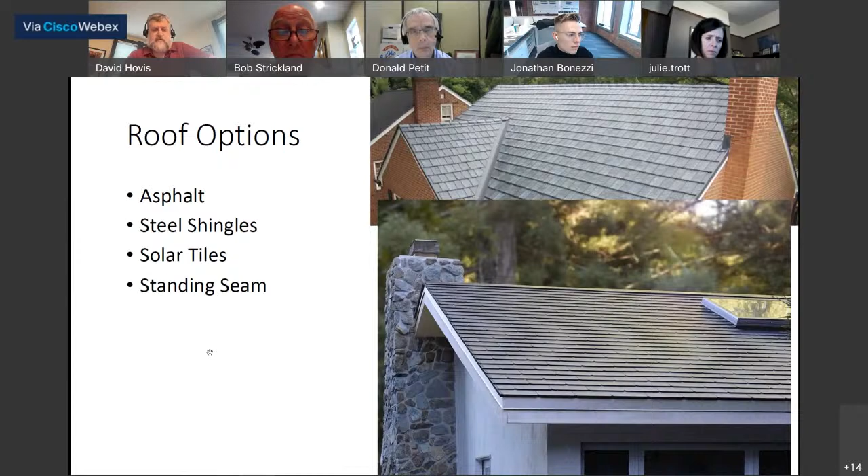Asphalt shingles have had quality problems over recent years. It's not hard to find stories about class action lawsuits involving particular brands and lines of shingles that turn out to be terrible, cheaply produced. We thought we bought good shingles 10 years ago, and clearly what we got were not good.

It is possible to mount solar atop asphalt shingles, but you have to be careful about how you do it so that you don't get water ingress.

Metal shingles are certainly more durable with great appearance, but the manufacturer says this is not compatible with solar. So because we want to add solar, that isn't an option.

The Tesla solar shingles sound like a great idea, but the jury's still kind of out. They're very expensive, although in theory, if you combine the cost of a new roof with the cost of solar, it's supposedly a bit of a wash. But Tesla is the only source of these, and until relatively recently they wouldn't even sell them in Ohio. Now they say they will, but they immediately tack on a $20,000 out-of-region fee because they don't have any installers in this area. Tesla is also very far backed up.

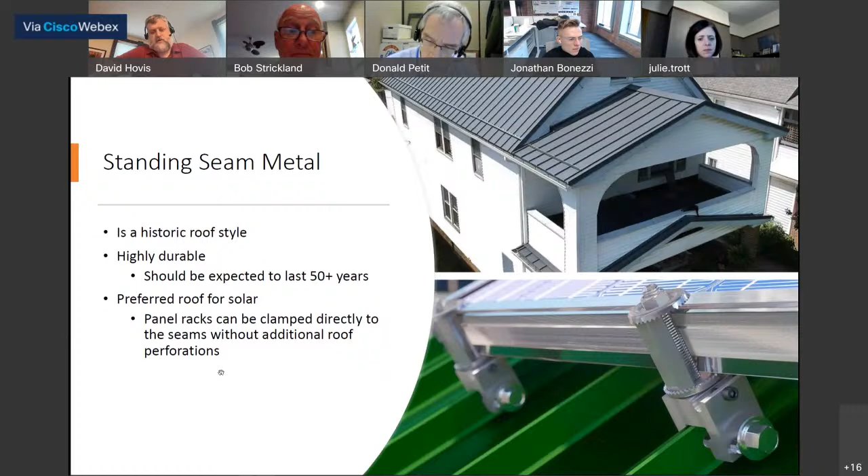There are numerous prominent houses in Ohio City with standing seam metal roofs, at least three of which you can see from various windows in our house since they're all within a half a block of us. I've provided numerous examples here. Probably the most prominent is the one shown twice, in the middle and bottom left, over on 1800 Fulton, which is very prominently visible as you drive up and down Fulton Avenue.

So what we are proposing is to put a standing seam metal roof on the house. We would like to fix it permanently and not have to worry about further maintenance issues. This is an upgrade, and it is more expensive than an asphalt roof.

We're using First Choice Roofing, who has done similar roofs in the neighborhood, and we want to use a standing seam product as shown here in the burnished slate color. We think the house probably had a slate roof once upon a time, although it's been a long time.

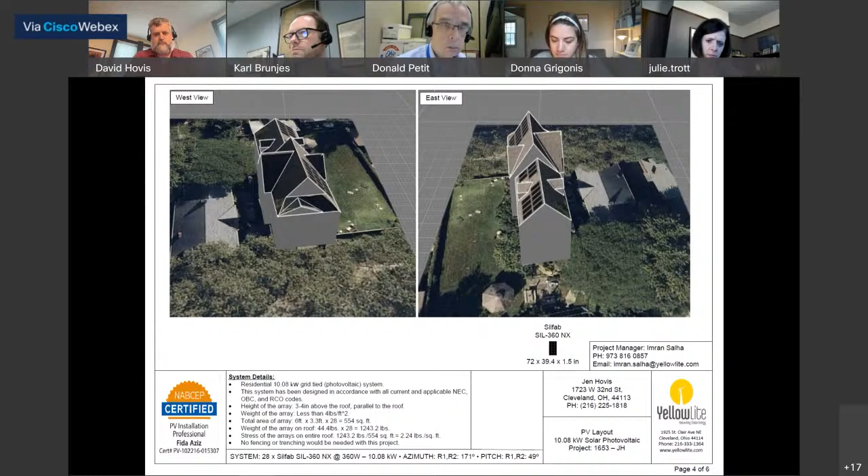This is a good example that all projects are taken individually and on their own merits, and have to be weighed in their own manner for what is appropriate to each project. Where we can look at precedent, yes, there are roofs, as were discussed, with metal roofs and solar panels—each of those was done on their own and in their own context. For new construction, metal roofs are appropriate.

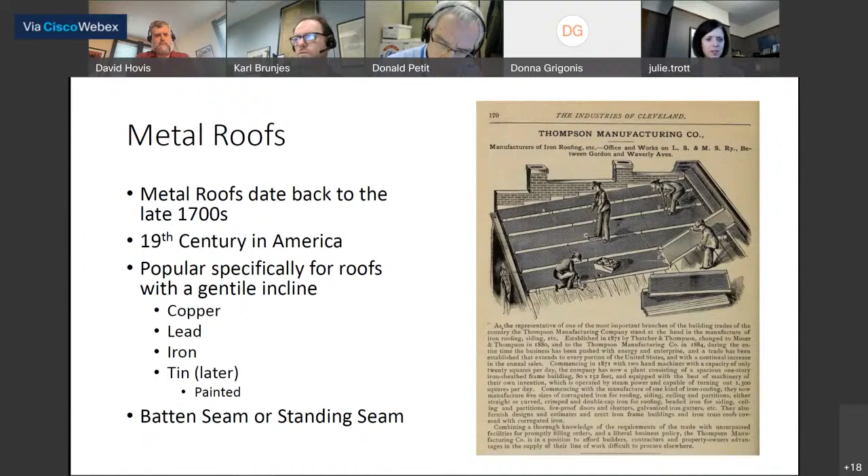Generally, they're for roofs with a gentle incline, as you can see here from this local advertisement from 1885. You can see how they're installing them. There were different materials used, and tin was the most popular one later, which you could paint different colors—that's why you would see red or patinaed green to match patinaed copper. The two main ones appropriate to the period are either batten seam or standing seam.

As I travel around, I usually take pictures in case I need examples, and there are several examples of historic roofs of this nature throughout the state that we don't necessarily have here. So it's always good to have other examples from around. I have a few pictures from Yellow Springs, Ohio.

Applying the Secretary of the Interior standards, it should be repaired rather than replaced. This would have been a slate roof due to the pitch and the time period, most likely. I tried to look at old building permits to confirm, because later on they would tell us what the building materials were, but there was no building permit for this, so it predates 1888.

The other permits on the street did not have any of that information, so I couldn't pull anything from that. But we need to make sure that we're keeping the historic character of the building and maintaining its visual qualities.

Appropriate replacements here would be slate, synthetic slate, metal shingles, architectural asphalt shingles, or dimensional asphalt shingles. An example of one of them was here—not here in Cleveland, but you get an idea of what it could look like.

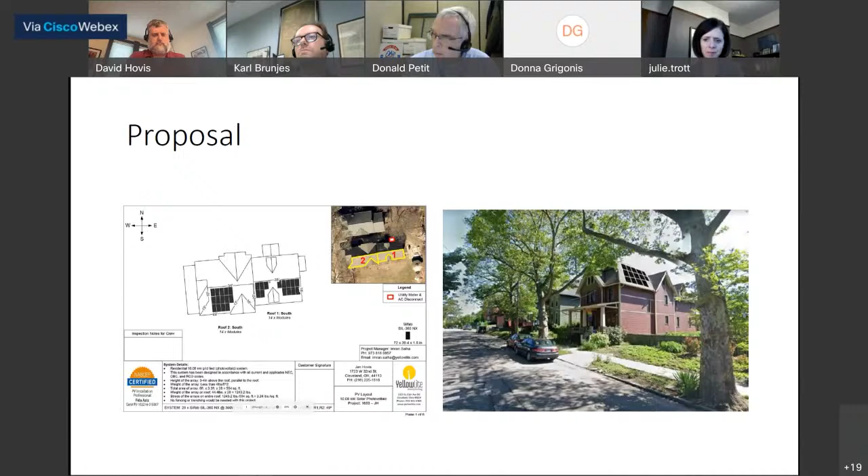Julie, you're muted. I'm the one who's muted. Thank you, Mr. Brunjes. We'll move on to Councilman McCormick.

Madam Chair, appreciate you having me—I always do that, so I'm glad someone else does as well. Thank you for having me this morning. Madam Chair, appreciate the commission hearing this case.

Let me first start by saying that the Hovis family has been not only an incredible part of our community as human beings, involved in all sorts of volunteer efforts, programming, our recreation league. If we think about an ideal community member and family, they are it. I know this commission is not in the business of the humans, but more of the structures, but I did want to start by saying we are extremely proud to have them in the neighborhood.

And that translates to their home as well, Madam Chair. As has been noted, they meticulously restored a historic structure in the neighborhood, similar to what I did—spent more money than they wanted to on the house. It is one of the most attractive and well-restored homes in the neighborhood. They have proven themselves to be incredible stewards of historic structures in our community and in this National Historic District.

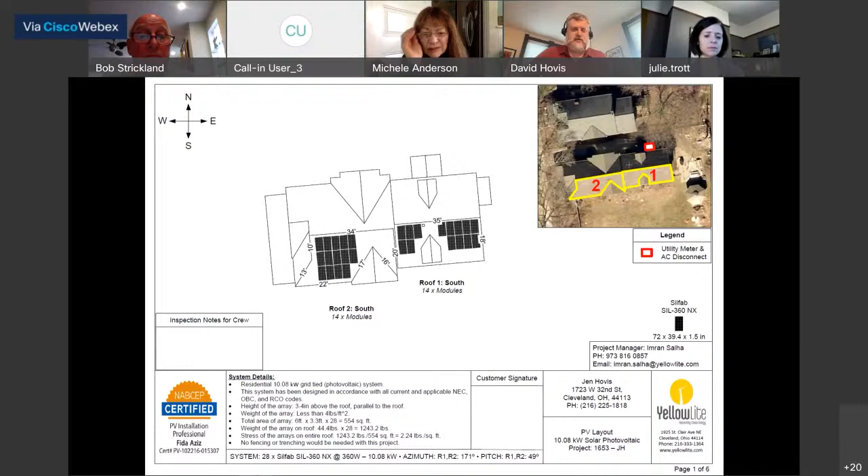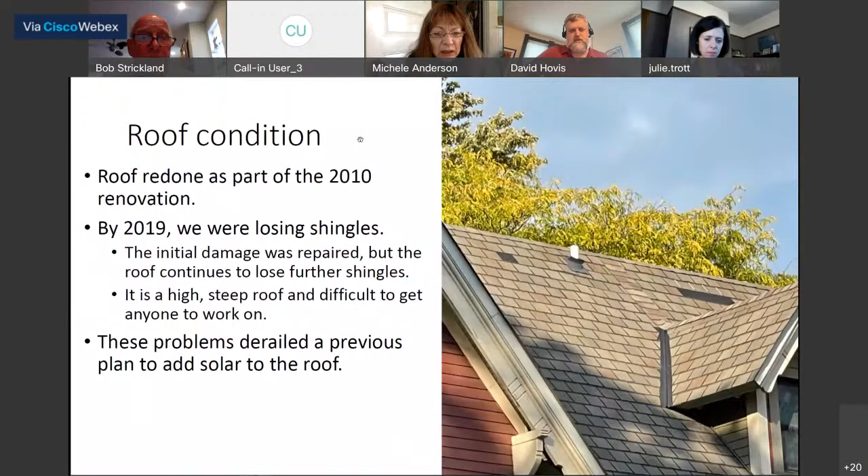So it's your preference to keep it the way it is. They haven't done the study to see if they can move it to the back, is what you're saying. Well, no, if you look at my presentation, what they had sent me before—admittedly, it's near the end of my presentation—you can see there were two panels south of that gable, but now, in between this and now, they determined they could fit 3 rows of panels. It does simplify installation a little bit, not to have a stranded set of panels back behind that gable.

Are your two roofs flush, or is there a step? No, there is a step. It looks like it's an addition, although I can tell you from having done the renovation, it is not. There's a couple foot step down from one roof to the other. I guess I'm trying to work to try to achieve your goal, but you meet our requirements—the more visible it is in the front, that is the issue.

I will say that, for example, the reason this roof is as visible as it is right now is because the house next door burned down in 2009. It was an arson, and that was actually the rooming house. The house that we bought was not a rooming house, it was just a 3-unit apartment building. It was well maintained, except for the fire damage from the house next door burning down, which necessitated huge amounts of work.

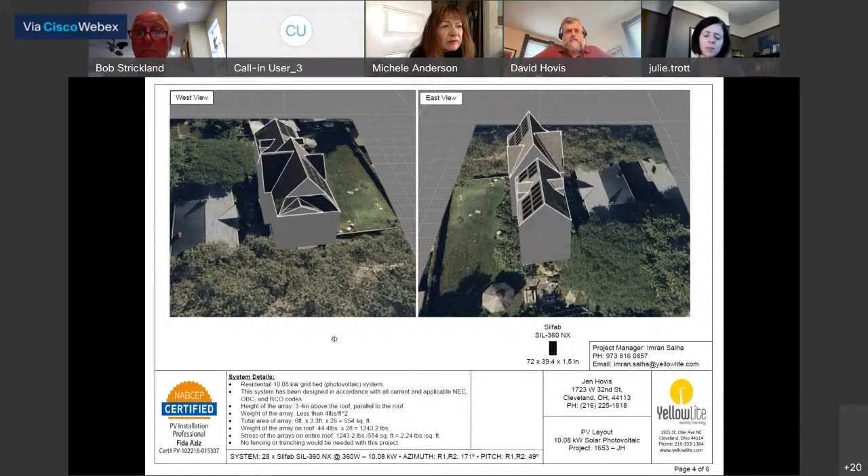We had a discussion with our roofer, and that was mostly around the idea that flat standing seam generates an oil canning effect due to thermal expansion and contraction. So having the striations in there gives the standing seam panel the ability to expand and contract without distorting, providing a more consistent visual appearance over the course of a day.

There's obviously varying widths of those standing seams, and the wider you go, you open yourself up for oil canning, but that's for a fairly wide standing seam.

I have mixed feelings about metal roofs. I think the more traditional profiles make it more appealing to me personally than the more modern corrugated profile, because that definitely takes it in a direction that isn't appropriate for the aesthetic of these houses. So that's my personal opinion. I think a traditional standing seam with smaller spacing of the seams feels more appropriate in circumstances like this than the modern metal panels.

But I do commend you for looking at solar and trying to find a compromise that can help you achieve your goals while still meeting the aesthetic of the area. So those are my comments. I'll move on to Mr. Bonezzi.

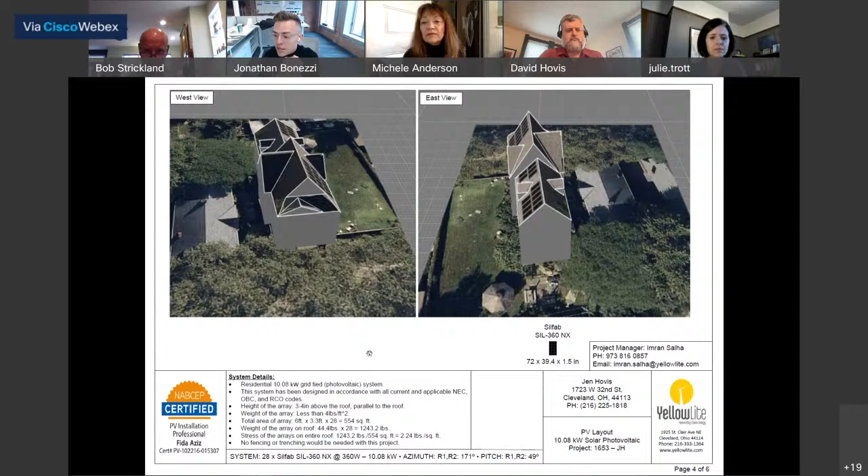That's not my expertise, but I think it's a conversation that should be had about maximizing as much as you can on that back elevation, and then seeing however many need to bleed onto the front, to meet your necessary values.

Thank you, Mr. Bonezzi. Mr. Brunjes?

Thank you, Madam Chair. I just want to add that the National Park Service guidelines were printed, or the bulletin was issued around 2011, so within the last 10 years. I was at the design review committee meeting, and Mr. Hovis, you mentioned potentially adding a garage in the future. I'm wondering if a garage is built, that might be an alternative place for some of the solar panels to help defer that.

I don't know, I think what I may have mentioned was that we own the lot to the south. It's a long story, but we bought the house, did the renovation, and made an offer on the lot to the south. In the meantime, we went $150,000 over budget, and then as we got to the end of the renovation, the people who owned the lot accepted our offer, and we had to scramble to buy it. Had they accepted at the beginning of the project, our thought was we would have consolidated the lots and put a garage over there.

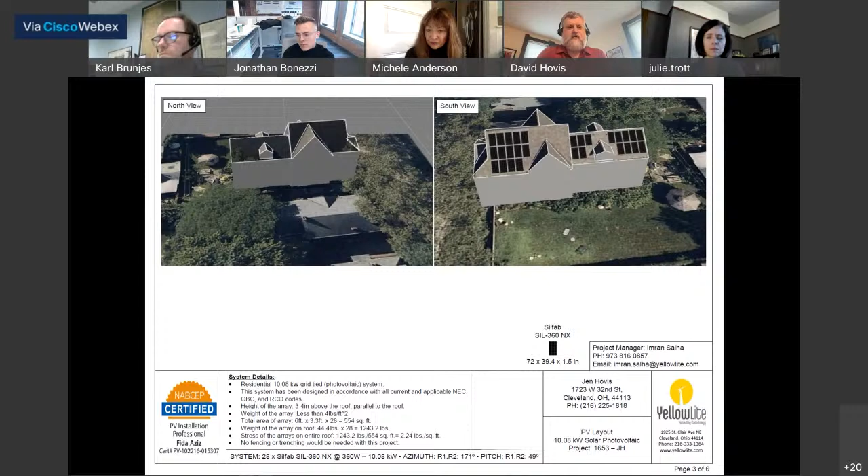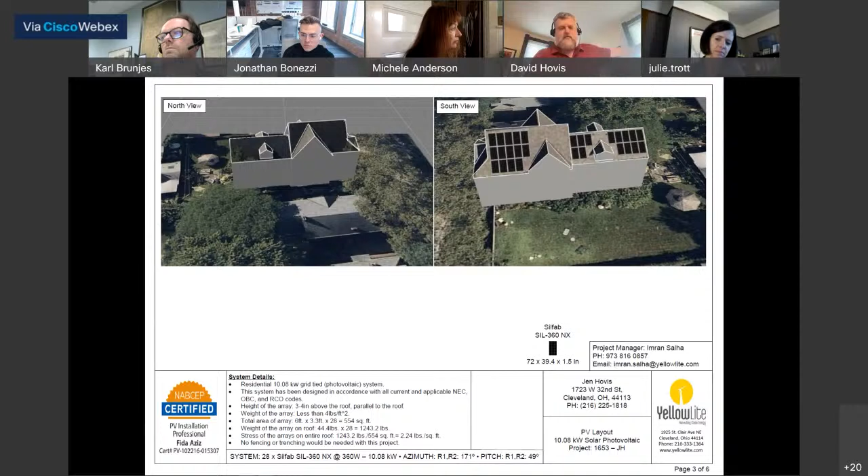Right now we have kept that lot because I had small children when we moved into this house, and they're getting to be bigger children, but we maintain that yard as a place for them to play. And never mind that there are also issues—if we put solar panels down closer to ground level, they would be shaded. When we first moved here, there was no house on the further south lot. There is one now; it was built a couple of years ago. So any solar panels down there would be shaded.

In any case, it's a moot point. You can't do it. The place to put solar is up high where it doesn't get shaded—these are panels you put up high so they don't get shaded.

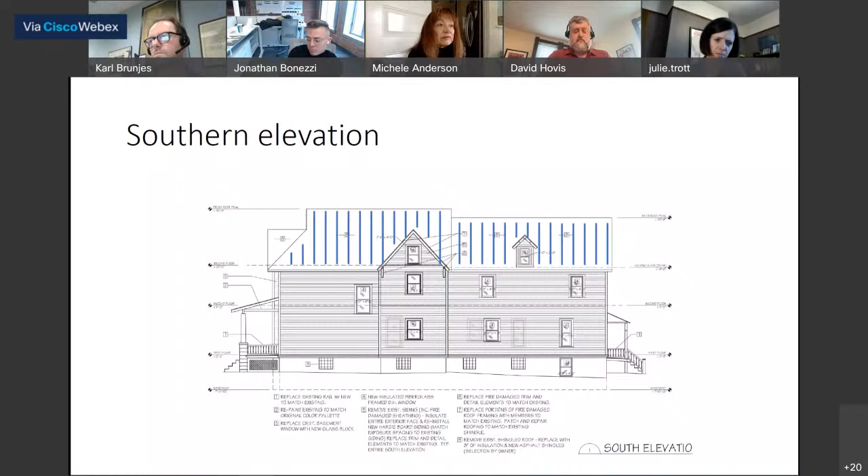And then on top of it, we have a concern. The U.S. Department of Interior guidelines, I did go look those up. It does say that in the event of a situation where maintainability is a concern, and again, in today's environment, the difficulty of getting skilled labor to get up on a roof, especially in this area, roofers don't want to work on this roof.

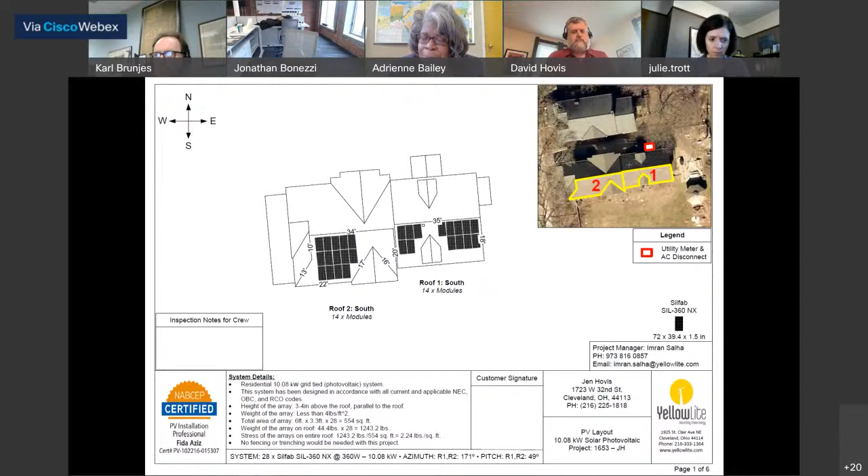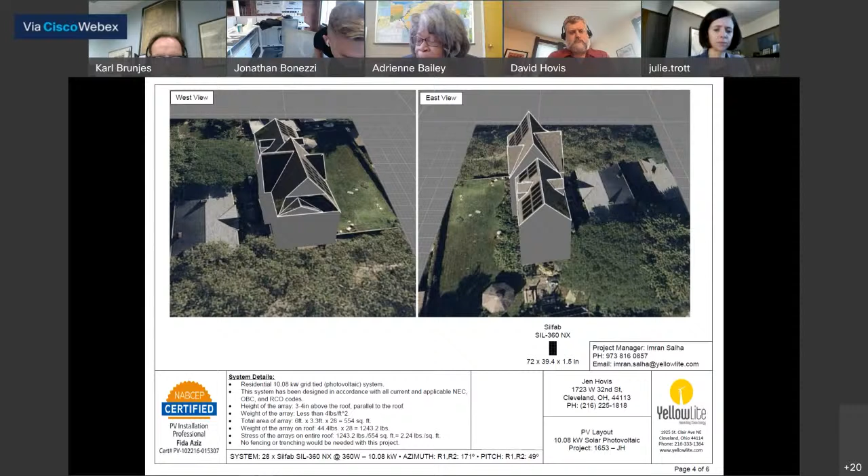No, I did have it up, but I don't want to open up another concept because I understand and appreciate Mr. Hovis for going environmental, trying to bring solar panels, trying to bring another option in for clean energy. I really appreciate what your goal was, to bring more than 50% energy into your home, and I really appreciate that. But also, in a way, I agree with the commission, but also had another option to think about. I was looking at my phone, but then I don't want to open up some other option that Cleveland may not be ready for right now. So I don't want to mention that. Thank you.

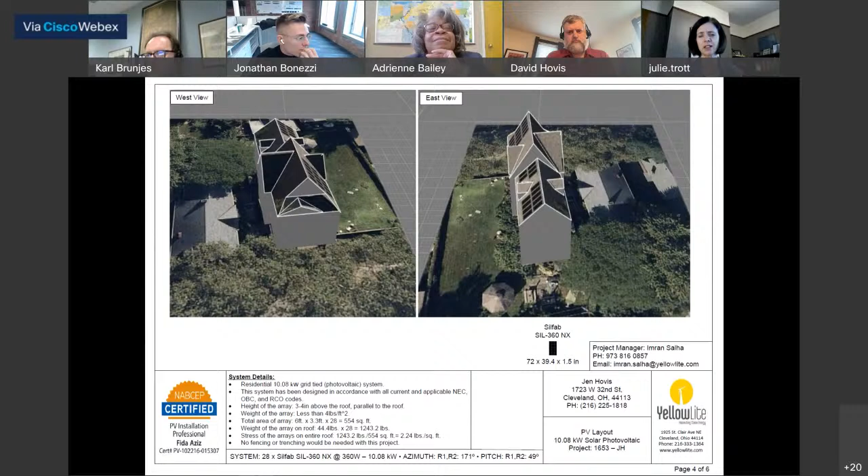Okay, thank you, Ms. Bailey. To the applicant, I see that your manufacturer also has the metal shake. What was your installer's view on that type of product that is more of a traditional layout? I inquired about the metal shake, and I was told that the manufacturer did not recommend its use with solar panels - there was no way to attach solar to the roof safely with the metal shingles, which is why.

And again, as a homeowner, I want something with a roof with better durability. I want a roof that is compatible with solar. That's standing seam, as the best set of compromises today. Tomorrow, I hope that in the future the solar shingles, which probably better blend a slate-like look with solar, will be an option. They just aren't today. If they were, that's what I'd be going with.

But we are still living in 2021, unfortunately. So this seems to me the best trade-off between getting a roof that has durability, that is reasonably historically compatible, that is compatible with solar, and that at the moment I can get done.

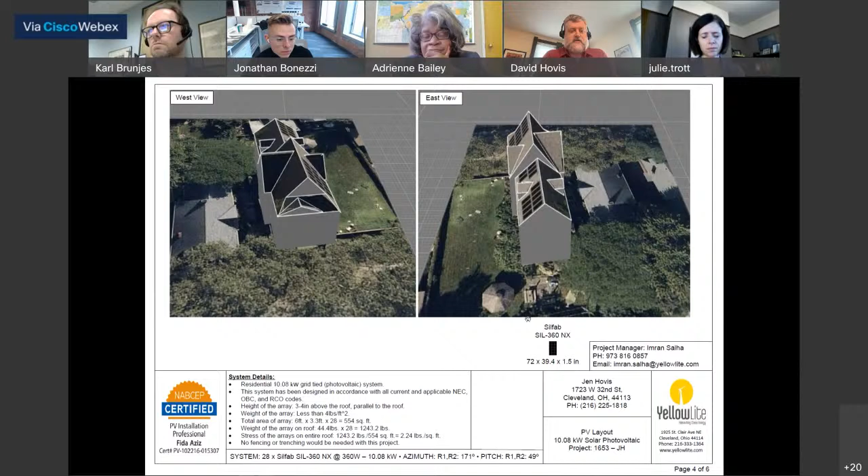I've locked up the contractors and paid deposits in good faith. My understanding is the material was already ordered and has been sitting around. So changing to something else at this point is a $20,000 change order.

I did submit this in October. I tried very hard to get on the Landmarks Commission's meeting in November, and I was told that the commission is very far behind on things, and that I was very lucky to even get on this meeting. So I've been trying to get feedback. I've been acting in good faith. I have made deposits.

Understand, and you want to move forward. And now, if we had to switch to shingles, I feel like I'm being forced into a roof material that I don't have faith in, and probably I'm out $20,000 in deposit on the metal roof at this point.

We understand the monetary commitments that these things take and the time, and we appreciate your patience. This is the hardest time of any time of every year, let alone a COVID year, to review these types of applications. So we appreciate your patience, but we want to do right by you and the entire community.

Could I just say one last thing? I really do feel like the maintainability portion is where I keep getting blown off. I would really like if more consideration were given to the maintainability aspect.

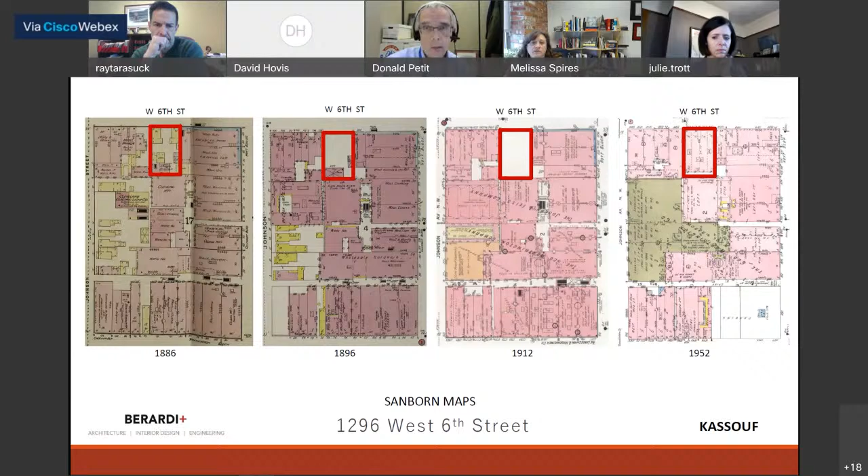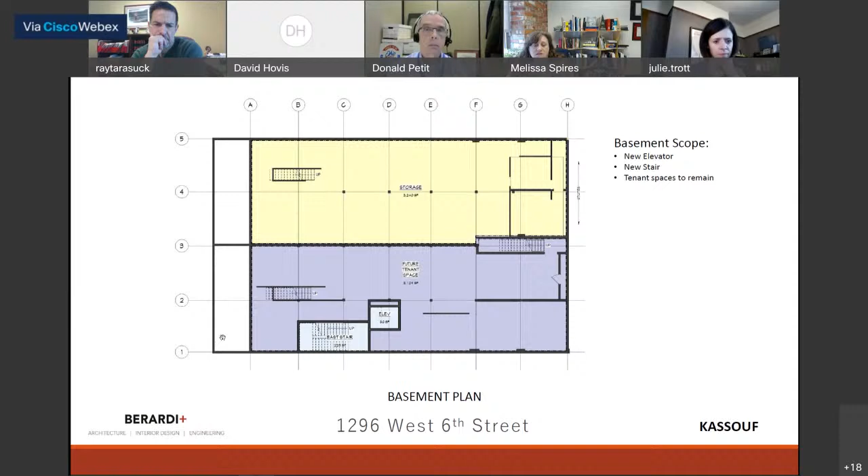On the first floor, you can see that stair and elevator on the southern portion of the building, with a corridor that goes out to the front of the building. We are also replacing all of the storefront on the south half of the building, and you can see the north half, the previously approved storefront.

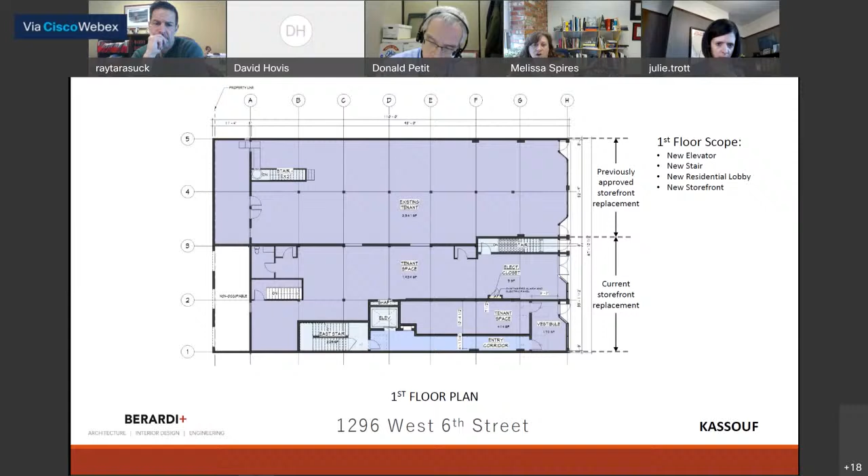The main portion of this project is renovating the second floor of the existing building to have 7 new dwelling units. These will be apartment units, and you can see the stair and elevator on the south. Along the back of the building there's an existing balcony, which we will reconstruct and reinforce, but it remains in place. We're also replacing all of the windows on the back of the building, and we'll have pictures of those later in the presentation.

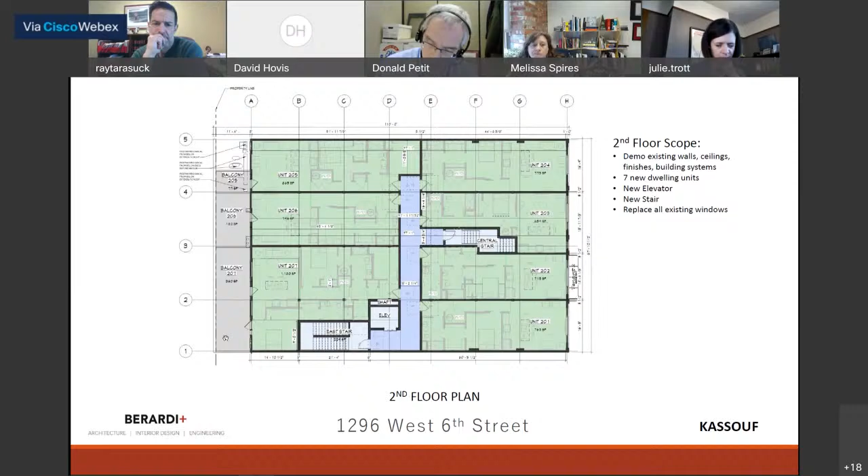This is the new proposed roof plan, showing there will be some new condensing units on the roof that will serve the second floor. We will locate those in the center of the roof, as far away from both parapets as we can get.

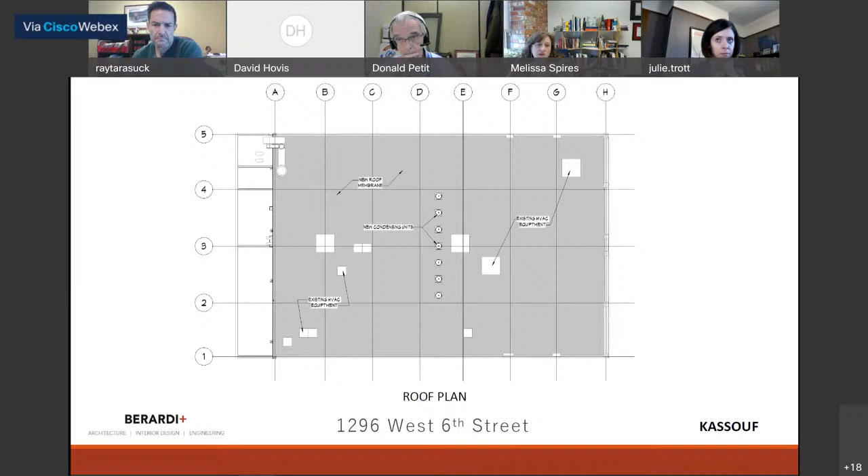Speaking a bit about masonry scope, we'll be cleaning and repairing the existing masonry on the building. We estimate about 20% of it will need to be repointed, and all of that work will be done to meet historic guidelines. The project itself is not a historic tax credit project, but we will use historic guidelines in the renovation.

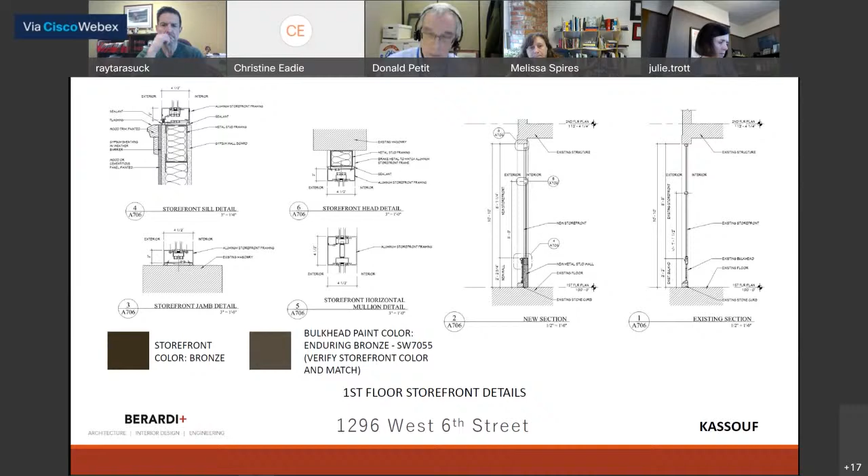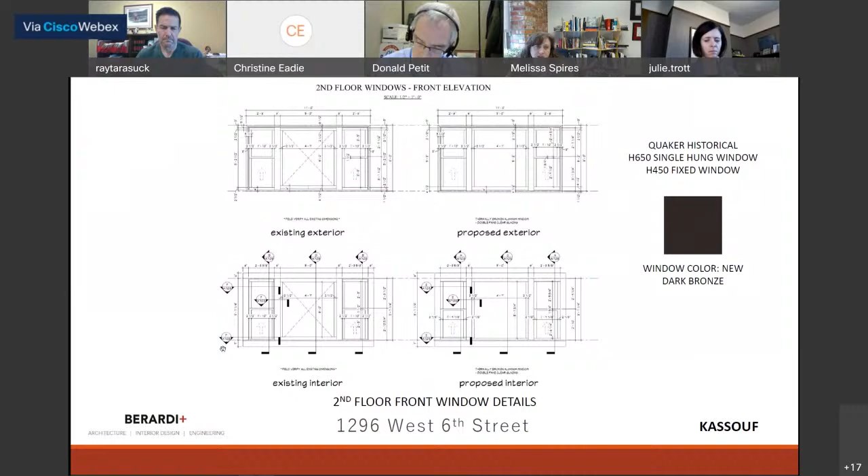Here we have elevations of the interior and exterior of the proposed and existing windows. The existing center window is currently a center pivot window. We will be replacing that with a fixed window and single hung windows on either side. We are going with Quaker Historical H650 single hung windows and H450 fixed windows in dark bronze color to match the storefront downstairs.

Here are some details of those windows with the existing moldings and brick molds, and the proposed panning profiles to match those dimensions as closely as possible.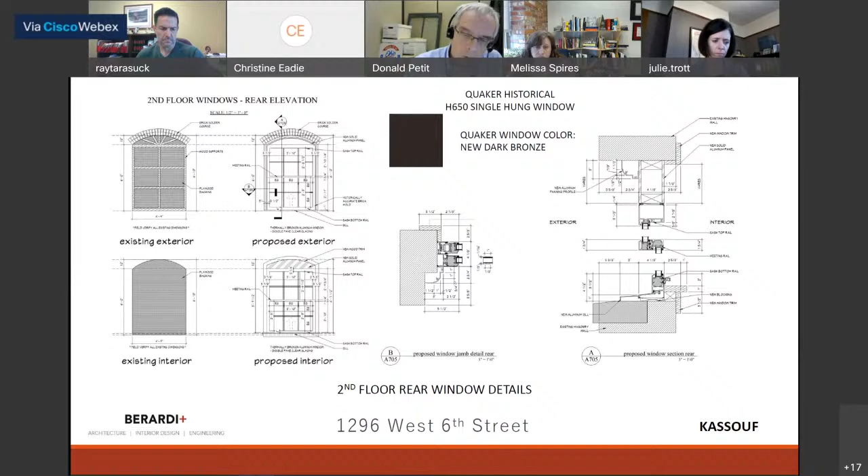And the aluminum H600 patio door and the H450 transom window. Again, we are using the same windows as on the front, even though we don't really have any historical markers to go by on the rear elevation to say what they used to look like, but we're trying to make it look as similar as possible in detailing to the front elevation.

Some details for the patio doors and transoms.

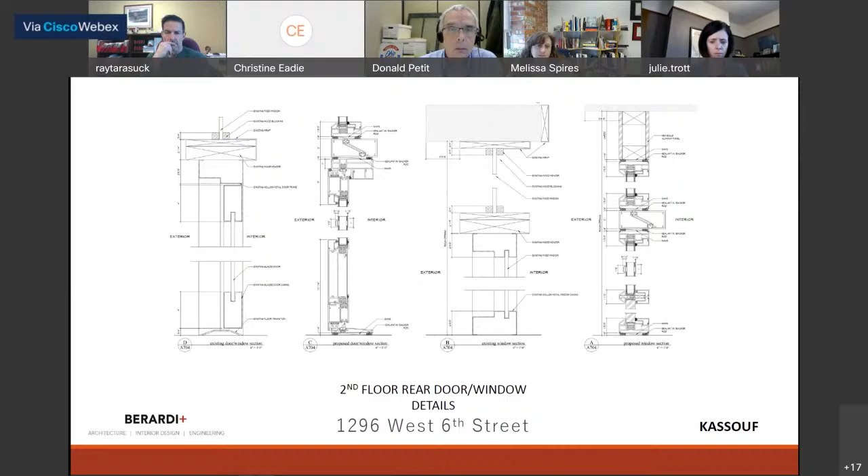And lastly, we wanted to address signage a little bit. Now, all the final signage for all the tenants will come back to you guys when that is proposed. These are just ideas we wanted to put out there. We see this as a vibrant storefront streetscape, so we'd like to have the option of multiple signage options for tenants. On the left, you can see a sign band that could be wood or metal with raised letters and building mounted lighting. Secondly, we'd like the option of awnings with text for the tenant. And thirdly, on the right, building mounted backlit signs. We would like tenants to have those options, but again, those would all come back for individual approval.

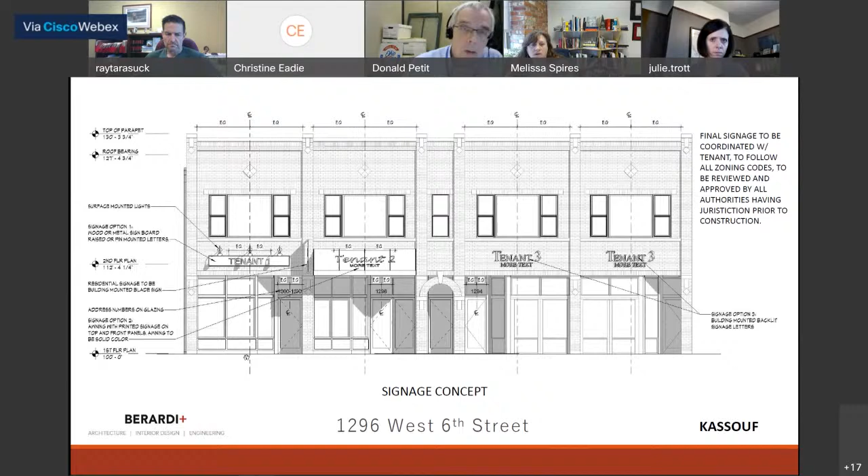And then for the residents, we have a sign blade mounted to the building. You can see it there on the left, between the awning and the building mounted sign. That would be for the residential portion of the building. But again, all of those will come back to you at a future time. I think the next slide is the last one, which just has a rendering of what those could look like. But I think that's it.

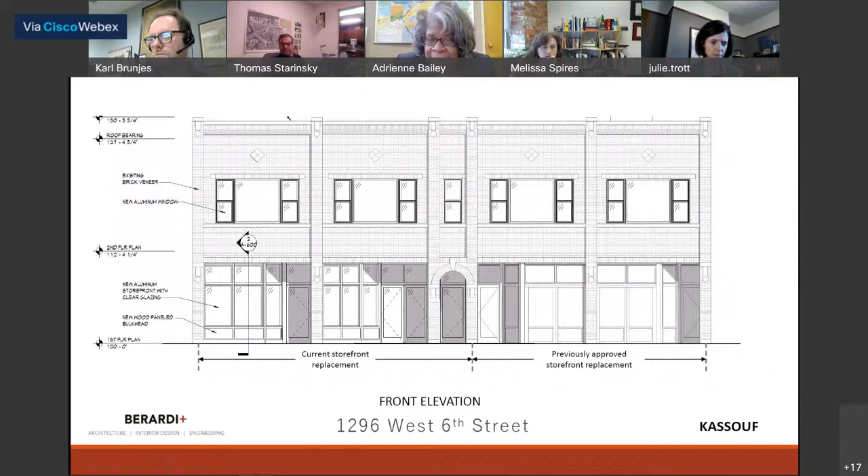On the original one, I'm just asking the architect, are you still doing the same concept? At the bottom, are you still continuing the same concrete base where the window storefront is going to basically sit right on top of the concrete? Is that same concept still going to continue? Yes, there's an existing curb there, if you will, that's under the storefront. That will remain the same. You're still going to continue it.

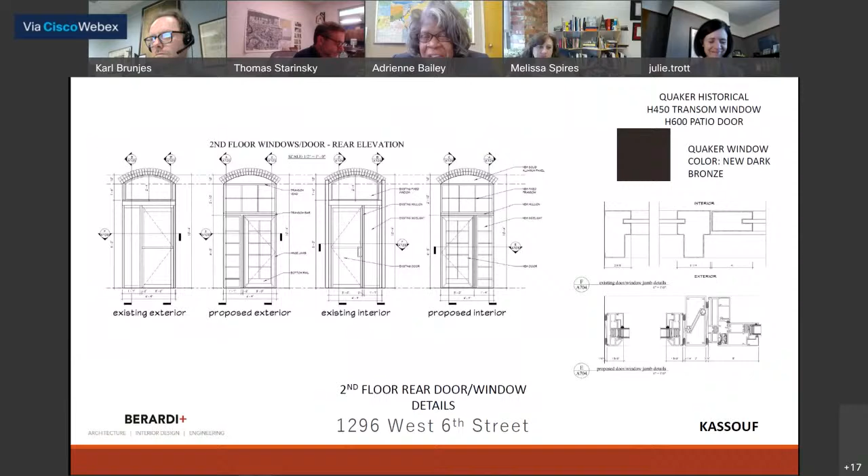Okay, I don't see that in the color design. Yeah, you're right, I think we did. If you go to the color one. Artistic interpretation. Yeah, you're right, we will keep that, that's existing. That's all I needed, I just wanted to make sure. So that was just my one question, but everything looks great.

I just want to make sure this line going above where the big tenant number 2 is, that's not a line going in that window, right? That small window above, on the second floor. Is it just one tiny little line, like an arrow right there? Yeah, that's where we... you mean in the storefront? No, above at the second floor window, right there, on the window on the left, not the center, the left double hung window. That narrow line right there. I think you're seeing stuff inside the room. You're seeing things through the window. Okay, that's what I thought. That's fine, that's what it is.

I didn't hear you mention anything. If you can go back to one of the photographs of the deck, the wood deck. I didn't hear you explain anything about the wood deck. Is that part of the neighbor owner? Is this part of the project? You didn't say too much about that. Nope, you're right, the deck itself is ours, and we are going to be reconstructing it. So we'll take it down and explain more about that, because you didn't say too much about that. Okay, yeah, it's still going to be a wood deck.

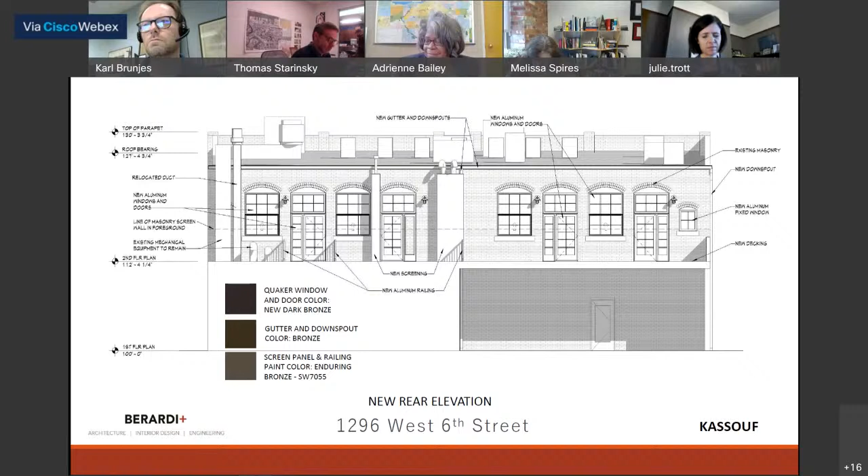Thank you, Madam Chair. This project is going to be a great improvement for the street. I have a question, I think this came up in the last presentation for the Northern Bay.

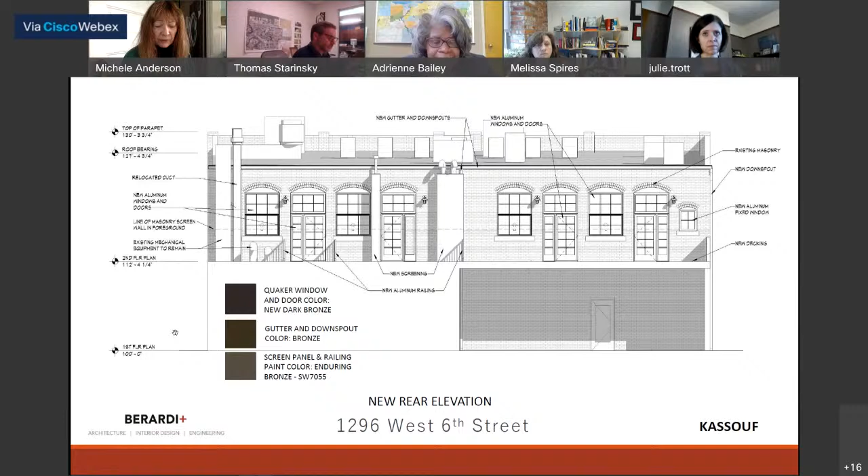The bulkheads, do we have any inkling of what they originally looked like, the original profiles? Oftentimes there were window lights for the basement. Do we have any inkling of what might have been there?

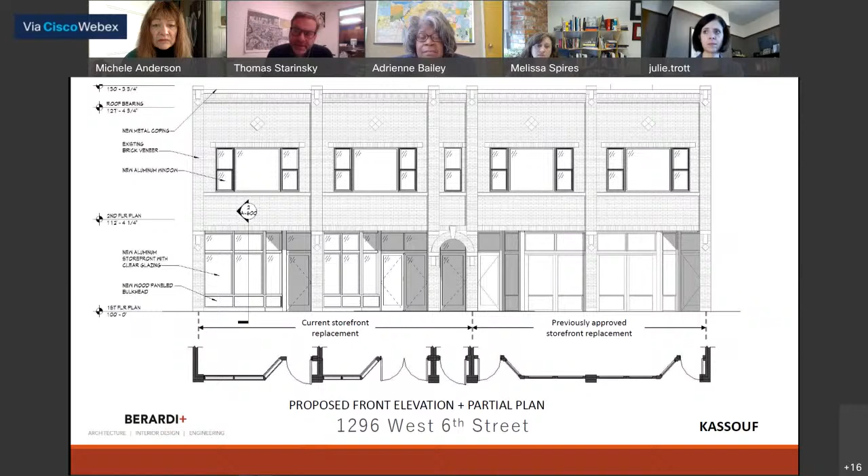We believe that southernmost bay was the closest, and it was very typical. We don't think the bulkheads had window lights into the basement in this building. They appeared to be, but what we've approved in other areas is pretty much that same kind of bulkhead detail with the raised panel, and that continues on in the new storefront system.

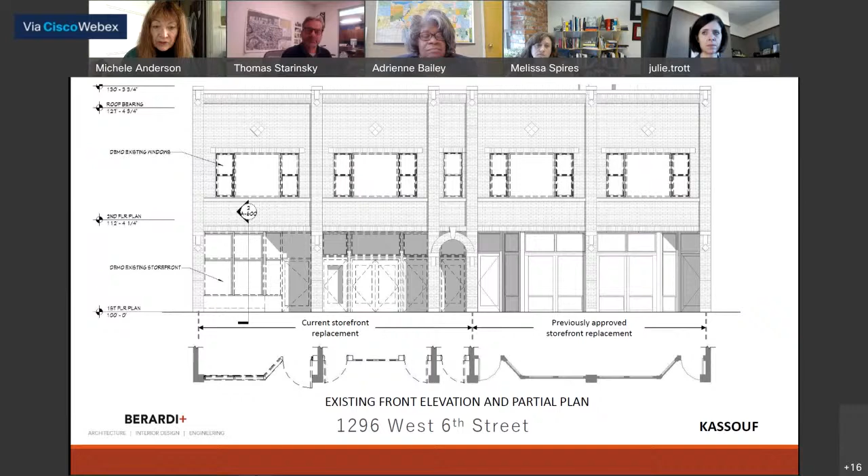Okay, that works for me. My second question is regarding the second floor vertical mullions between the double windows and that large pane window. In the original, at least to me, it looks like those mullions are a little wider than what is being replaced. And I kind of like the original width of the mullions, I think it just makes the windows look more substantial.

I would like to see that retained. Okay, I think we tried to maintain that, we're showing it's like a 6-inch wide piece there in both the proposed and the existing. So we are intending that, I don't know if it maybe didn't come through in the rendering very well, or maybe it's just the way I'm looking at the rendering. I just want to see that little wider mullion, I just think it has a nicer proportion.

And I do agree that the vertical mullion on the southern middle storefront, I think it'd be better to be removed, so I'm in agreement with that. It's like everybody's okay with that. So yeah, this looks like a great project.

Thank you, Ms. Anderson. Other feedback from the commission?

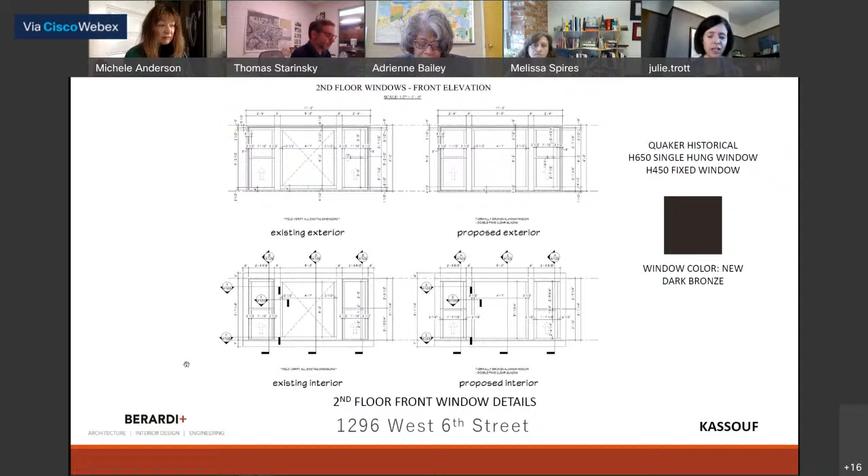I would echo what has been said. I think it'll be a great enhancement for the district. I think it's a very sensitive restoration that you're proposing.

I would echo though what Mr. Brunjes said, that since it's not a very large building, I would personally prefer a signage program for the building, so that you had a more universal application of signage, if not across the whole building, at least on each side of the building. It's small, so to have a different application of signage on each bay, to me personally, is not my preference. So as you continue that development of the signage, I would just think of the building as a whole, versus just its parts.

Madam Chair, I'd be glad to work with the property owner and Berardi, if that makes sense. We did do a similar thing to the West 9th Street lofts, where we started getting a lot of signs and we kind of said, wait, time out, we need to figure this out. Melissa and I actually have had a lot of conversations about the southernmost bay and how do we sign the residential piece, but also create a good opportunity for signage for that retail space in there. The northernmost bay is intended to have just one tenant, so that will be pretty good, but it could get a little tricky on that southernmost bay. So I'm obviously prepared to work through that as that gets through there.

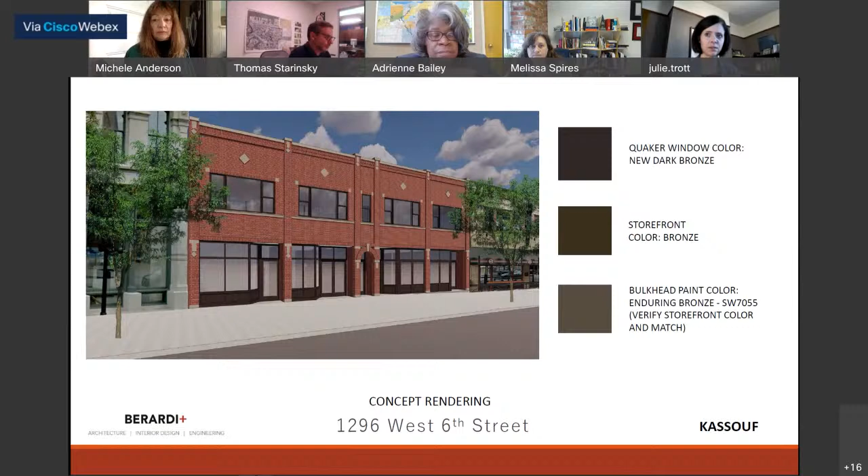Other questions or comments from the commission? Okay, would someone like to put forward a motion? I'll make a motion. The motion is to move that the applicant be approved.

I would like to add that the deck design be submitted to staff, and if the staff feel that it needs to come to the commission along with the signage in the future, that'll be their discretion. Okay, so we have a motion to approve as presented with consideration to come back for signage, is that what I heard? Yeah, the deck, my understanding is that the deck part is kind of incomplete, correct?

So you would like them to submit the material for the deck to the staff? Sorry, I missed that. Staff, yeah, to the staff. Mm-hmm. Perfect, I apologize about that.

So we have a motion with one condition. Do we have a second? Madam Chair, I would second that with the addition that we accept the Design Review Committee's recommendation to eliminate that mullion in the transom above the double door. Thank you, I accept that. Okay, so you accept it. So we have a motion and a second with the amended conditions.

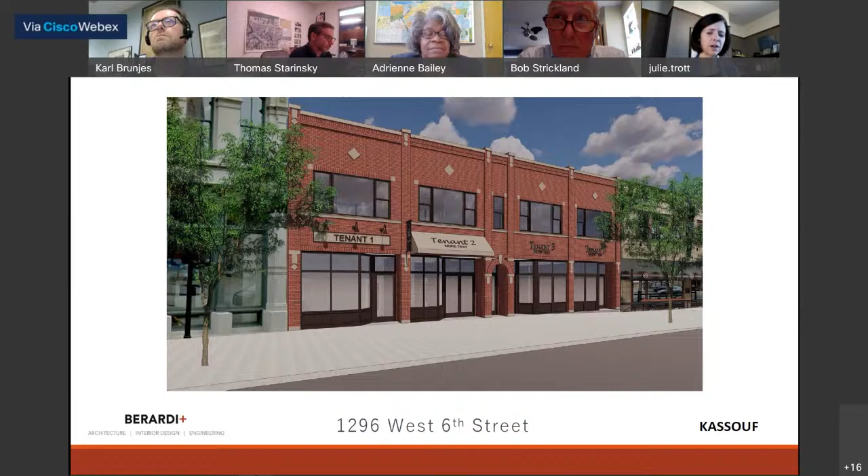Any further discussion? All right, Mr. Petit, please call roll and announce the results. Ms. Anderson, yes. Ms. Bailey, yes. Mr. Bonezzi, yes. Mr. Dryer, yes. Mr. Strickland, yes. Mr. Starinsky, yes. Ms. Trott, yes. Motion passes unanimously.

Congratulations. We look forward to seeing your project move forward in the future.

Good morning, my name is Wesley November, and I'm proposing that we move forward with this. I'm based out of Lakewood, and I've done a lot of porch renovations out here. What happened is we started with this one, and in Lakewood they don't require permits for just refacing the deck. So when we did this, we got stopped after we did the deck and the stairs, and as we were going to put new railings on, the inspector gave us a pause, and we had to go through several meetings to get to this point.

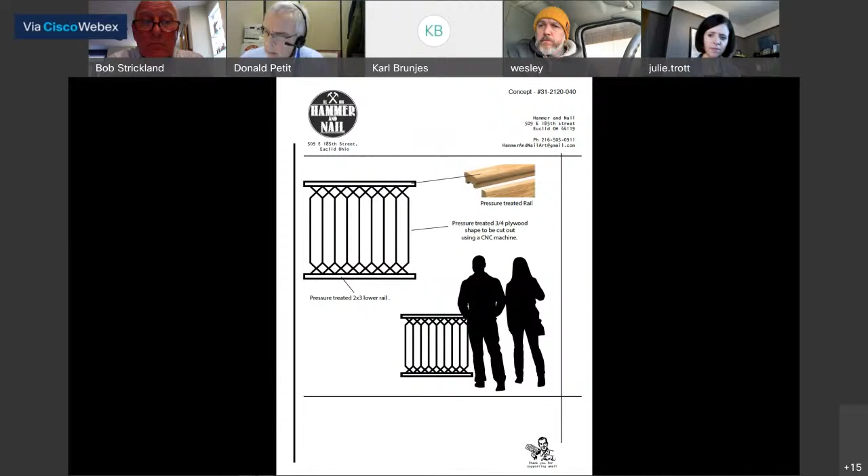It is the same railing, it just had some extra decorations put onto it. This middle part, oh, okay, I see. All right.

No comment right now. I don't have no problem with the railing matching the window, but I liked the previous one with the thickness of the original one. So I'm going to think about that one. All right, thank you. Great, thank you.

Mr. November, did you have feedback on what Ms. Bailey just said? Yeah, well, the reason we took the old railings down too is there was just so much damage to them, just water damage. Some of the actual pickets, it was literally just the paint holding the shape to them. So between Christine and I, we came up with this concept, and we just thought that this would be something to complement the home and the neighborhood.

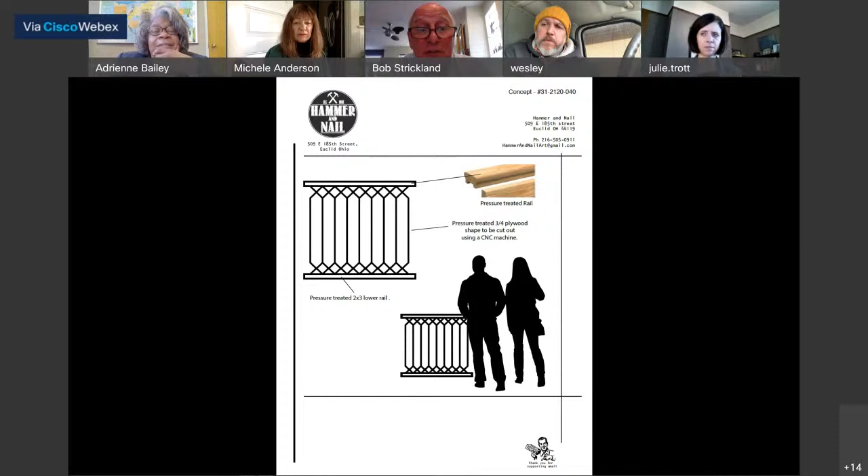I just raised my hand, Madam Chair. Mr. Strickland, looking at this slide right here, it indicates that the spindles are pressure treated 3/4 inch plywood shaped and cut using a CNC machine. Did you say that the rail was metal? Yes, they're metal. This was the original concept, but we went with the metal, and so I was going to just make a sample out of it with the specs and the sizing.

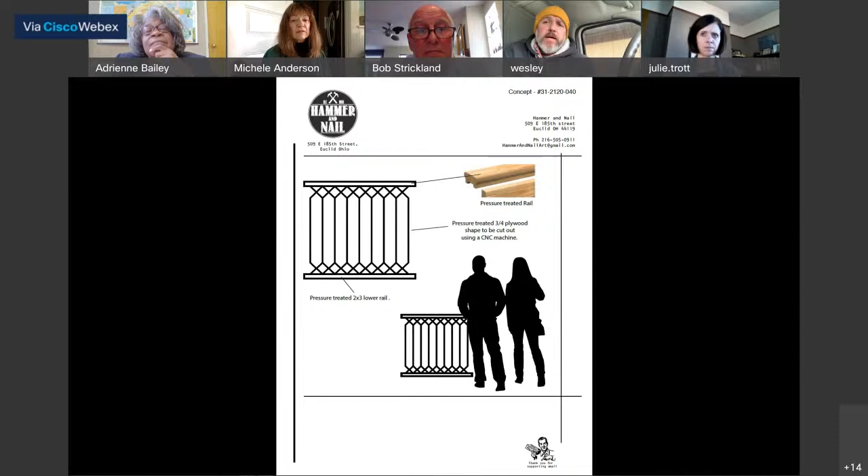If I could just revert back to the last comment on the spindles—anything can be made, of course, with a lathe and a duplicator piece. On average, I'd say at least 70% of all the artisans in the Cleveland area, myself included, I do everything from metal and concrete and woodworking, and specialize in fine woodworking. I've designed multiple restaurants and stores and whatnot. On average out here it's $75 an hour per artisan, and each spindle takes within an hour of prep time. So, I mean, anything can be done, but we don't want to spend $10,000 on railings.

Did you say that these metal rails are already fabricated? Yeah, well, they're all cut out, some assembly required, but everything's set and ready to go. How does the top and bottom rail compare dimensionally to the original? The top and bottom rail are identical to what was there before—same sizing, thickness, the radius for the handrail—and they have a channel inside them where the top and bottom of the railing sits and is bolted to the wood.

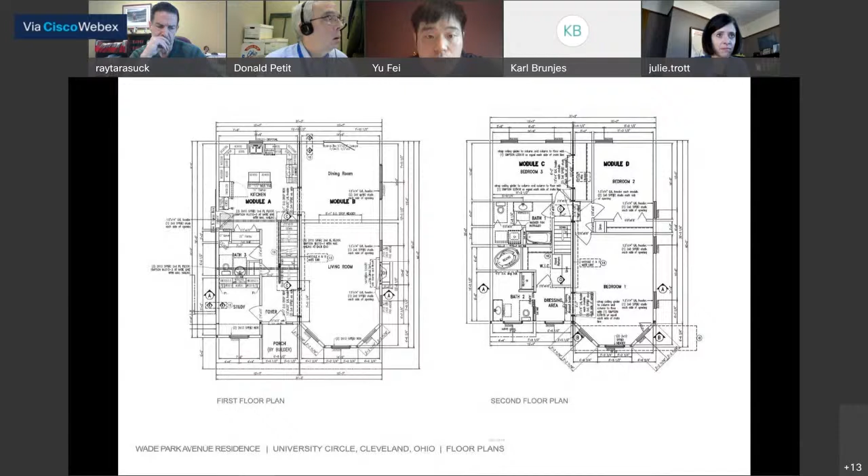Next slide. This is the floor plan we reviewed twice, and it's a prefab module construction. We have 4 modules. Next slide, please.

That's the new rendering. We see the view from the street. We designed the porch according to the neighbor's house to respect the historical look, and we rotated the orientation of the roof.

Next slide. That's the original look from the street, and now it's the side driveway. We add the side door to the driveway, and we keep the window for the 3rd floor, so it's consistent with the neighbors also. Next slide. There's a back door, and it's convenient to the garage.

We took advice from the board to remove the fireplace. Now we have an electrical fireplace inside. We don't have an exterior fireplace. Next slide, please. So that's the rendering from the southwest corner.

Next. That's the front facade again. Next slide. That's the southeast corner look. Next slide. That's a close look at the porch. We can see the front door and the side doors.

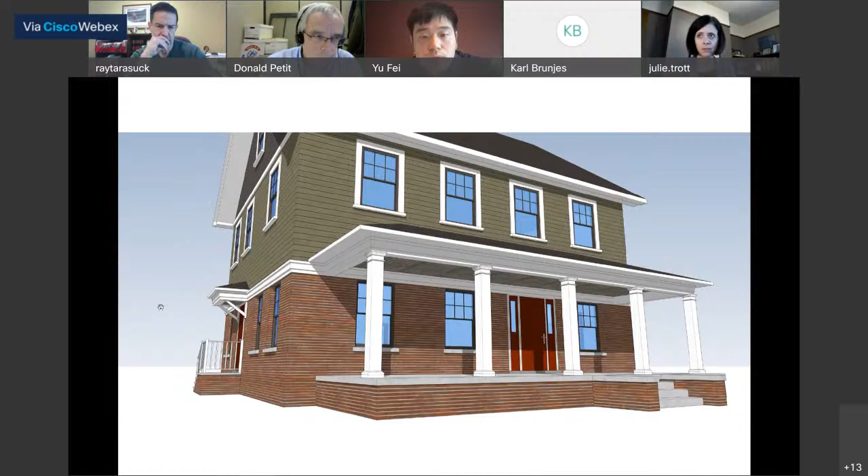Next. That's the material we are using. For the first floor, we use all red bricks. For the second floor, we use crane board. It's a solid vinyl, and we use asphalt shingle roof. And we use double hung windows. Next slide.

Beyond the porch, we use hydrangea for the landscaping, and we will keep the original tree in the front. We will trim it and keep it. Next.

That's the rendering. We would like to blend the new construction house into this neighborhood to respect the neighborhood in a historical looking way. And I think we made all the changes. Hopefully it meets requirements from the committee board. Thank you for your advice.

Thank you for the presentation and your sensitivity to our comments previously. Before we go into the design review, Mr. Petit, you had comments? No comments. I was just going to report on the design review committee.

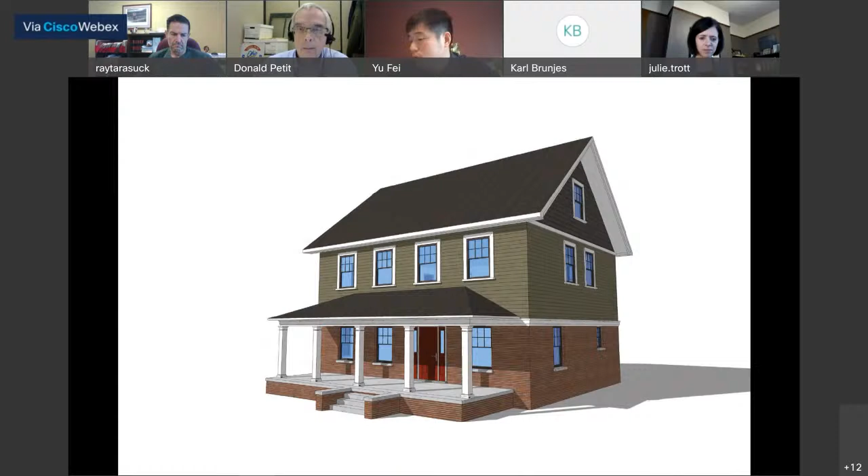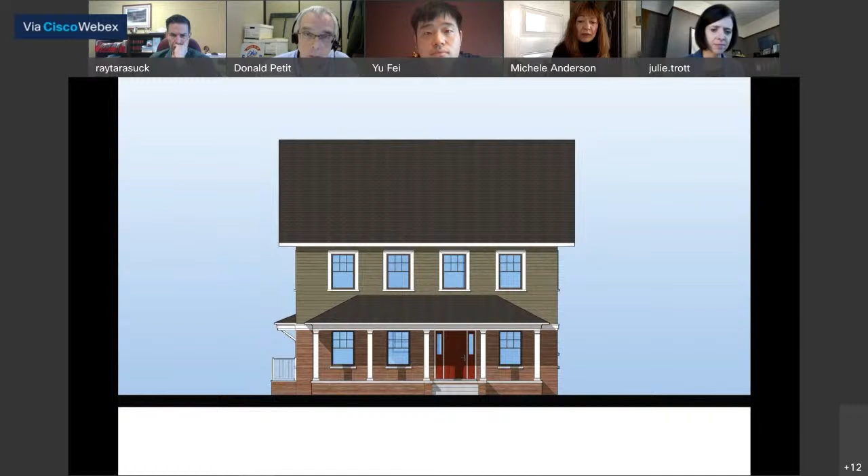But I like that they are mimicking the brick on the first floor with the shingle above. I think that's a great look, and I'm glad that you oriented the roof gable to be more consistent with the other homes. So I really appreciate these changes that you've made.

Oh, do I need to say something? Sure, go ahead. Oh, okay. That is the only concern we have. We really appreciate Ms. Anderson's comment, and that is the only question and concern I prepared before the presentation.

It's very hard for us to add a dormer in terms of the function and the cost. All the neighbors next to us have an attic, and there's a use for the third floor. It was like a servant's bedroom or kid's bedroom for the third floor. But for a more modern living style, we don't design for attic use.

But to respect the look, we have two windows on the other two sides, so we have that just to make it a contextual look in the neighborhood. And we are very lucky or successful to keep the cost minimum to make the house affordable to the homeowners. So we try not to add any additional unnecessary cost. That's why we decided this time not to add a dormer at the front.

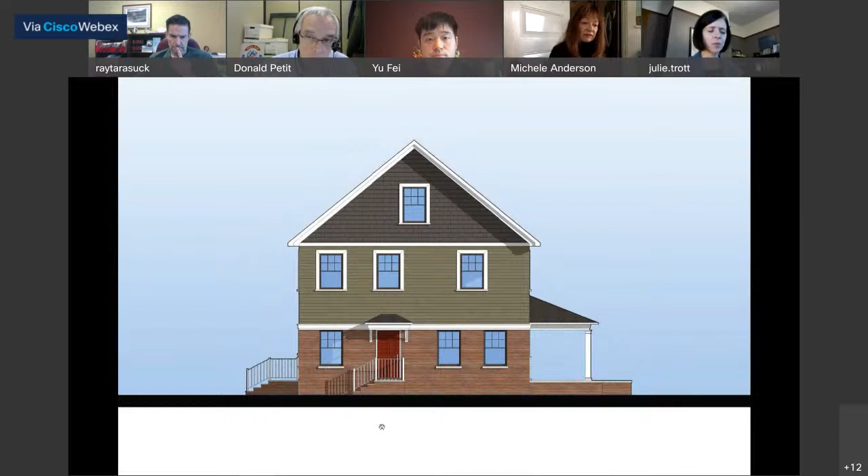Well, I would agree with your comment. My preference would be to have a dormer on the roof because it does add some articulation to the front. But I appreciate the modifications that you've made and the strides that you've made in this design to meet the requirements related to the roof direction and the front porch and so forth. So to me, that's not a deal breaker, but my personal preference would be to add a dormer and move the windows from the sides to the front, if that would align with your design. But like I mentioned, I can support this design as is based on the modifications you've already made.

Thank you. Other questions or comments from the commission? Ms. Bailey? Well, I appreciate you now taking our concept to lower the roof and making it less massive. So I appreciate you doing that. I do agree that the dormer will help enhance the house, but also understanding that the purpose of this house is to offer, to make it more of a lower cost home, not trying to make it a higher cost of a home.

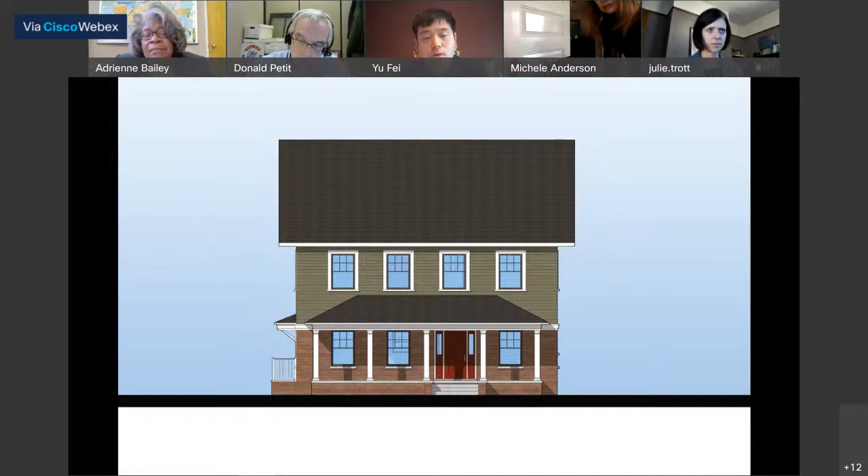it's nice to the house itself for the side door. But if I add all the railings at the front, it doesn't match the house look very well. So that's our concern, not to add that. And it's a wider porch, 3 feet wider than neighbors. In total, it's 10.5 feet wide porch. For safety concern, I think the extra width of the porch, we address that. And with the hydrangea, which can grow taller than the porch, so it addresses the safety concern and also gives a nice looking. So I hope I answered the question.

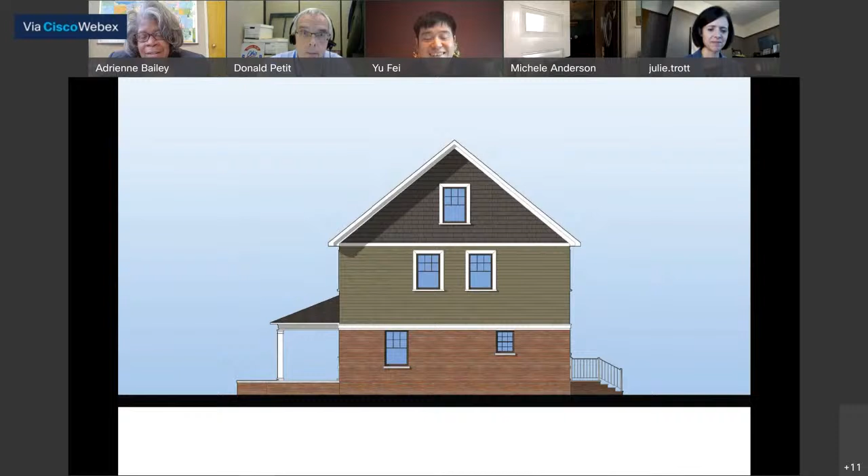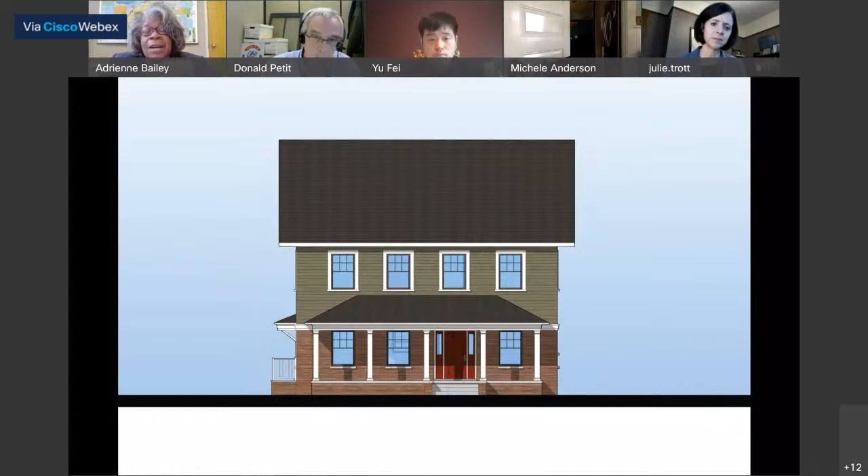Okay. Any other questions, Ms. Bailey? Or does that answer your questions? That's it. Okay, thank you. Other questions or comments from the commission?

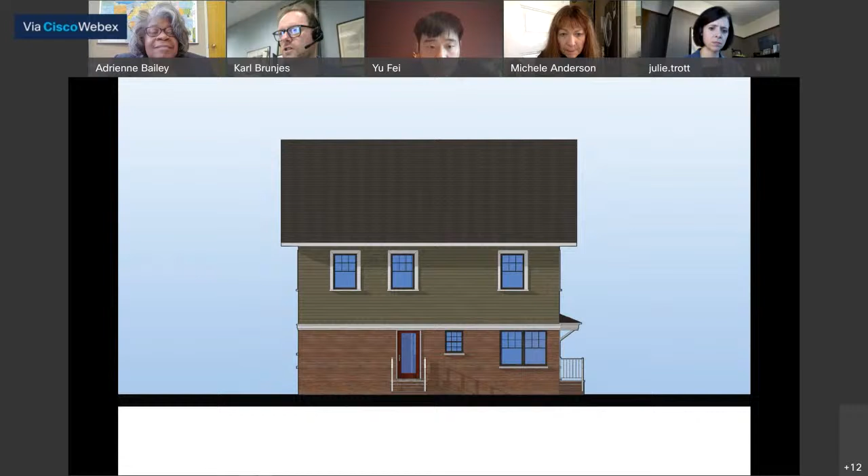Mr. Brunjes? Sorry, not commission, but two things. I know that there is historically a setback on this street, so make sure that the front of the house is in line with the other ones. I think it's in the deeds from when it was originally done. I noticed in two of your windows, you have 6/6 here, one in the back and one on the side, where everything else is 6/1. Is that just an error not caught, or is that intended to be 6/6 on those two smaller windows?

Sorry, what's the question for the smaller one? You see how these windows, the larger windows, have 6 panels over 1 here. This one here is 6/6, and this one is 6/6.

Well, one is for a bathroom, so we use a smaller window. But for this side, we see.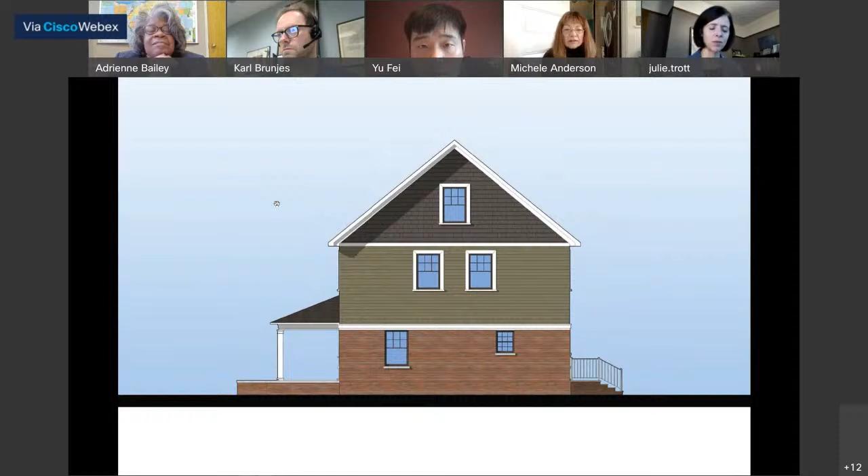I think he's specifically talking about the glass, so the clear lower panel of the double hung window versus the panel with the mullions. Was that an oversight? Did you mean to have those two windows have a different aesthetic than the other windows in the house, or is that just a mistake? And should that be a 6-pane-over-1 window type to match the rest of the house?

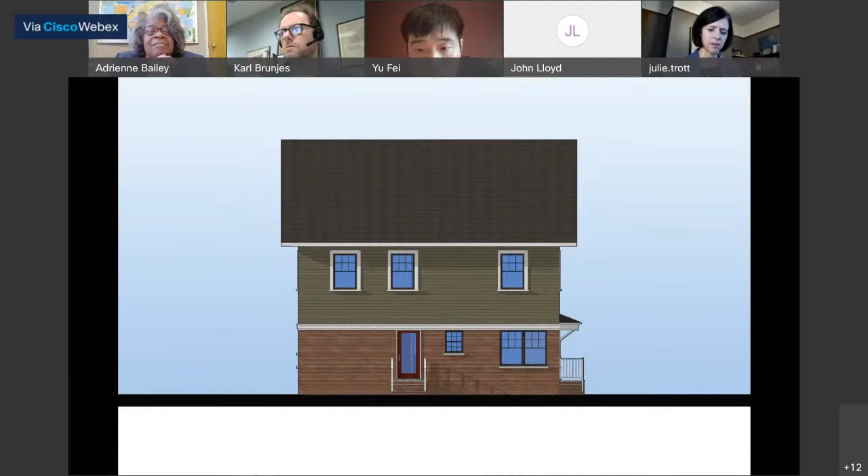Okay, John, can you answer this question? It actually can be changed. It was done by the architect, who came up with that idea. So we can actually make them all identical so we can have 6/1 throughout the whole house. So that's not a problem to change. That's just aesthetics, easy to change.

Okay, I think that would be our preference, where Mr. Brunjes is going, so you have consistent design of all your windows across the house. Any other questions or comments from the commission? That was a good catch, Mr. Brunjes.

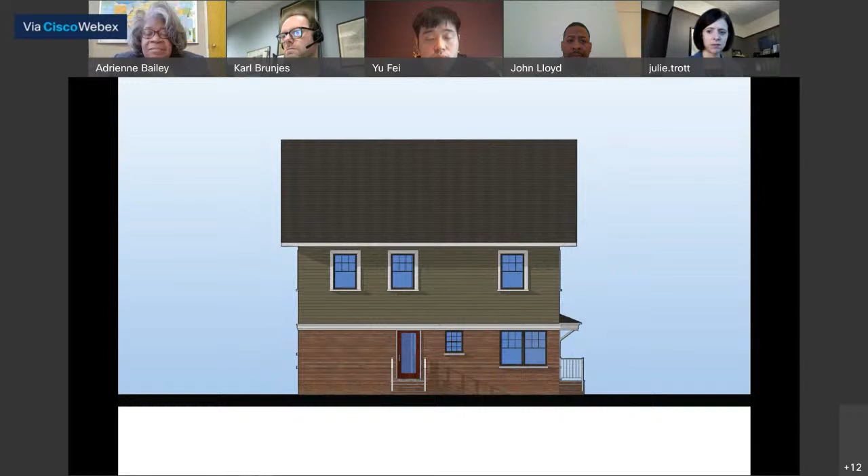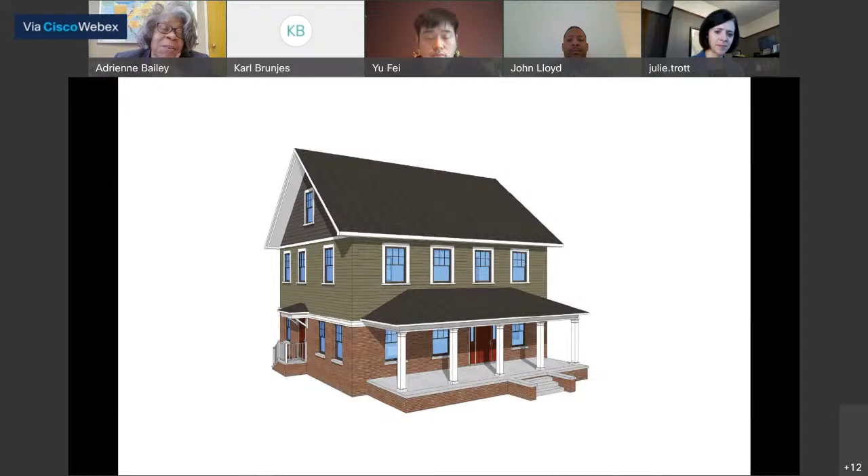If there are no other questions or comments, would someone like to put forward a motion? Go ahead, Ms. Bailey. I would like to have the railing, but I understand your concept. I make a motion to approve the presentation as presented.

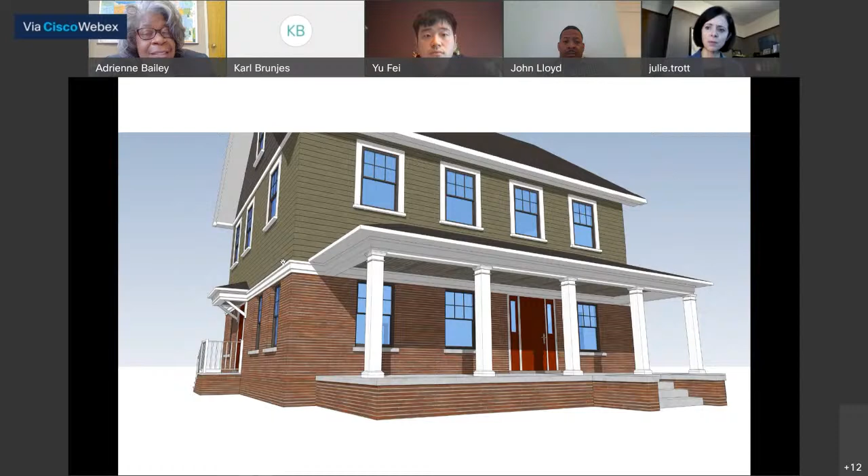With those two windows, just change it to match the others, 6 pane over 1 single at the bottom. So a motion to approve as presented with a condition to change the two smaller windows to match the aesthetic of the other windows in the house.

Mr. Brunjes, I see your hand up. Is that what you were going to say, rather than being specific of a 6/1, to say as the window configuration on the rest of the house? No, but we also do need to see all the specifics on the garage, which has not been shown.

Thank you. So Ms. Bailey, would you add that as a condition, to submit the design to staff for review and approval? Yes, I include that as well.

Okay, so we have a motion with two conditions. Should we add matching the setback? I don't know if that's a condition or a requirement. Mr. Brunjes, do you have feedback on that? I think if you're looking for consistency on the street, it should probably match the setback of the rest of the houses. The porch, I don't think necessarily has to, but the front facade should be in line with everything else on the street.

Whatever that setback is, and maybe it's just in the rendering here, it might be that 50-foot setback. I can look at the deeds and give that answer if Greg doesn't already have it. Whatever is consistent on that street would be appropriate. Does the applicant understand the request and have any issues with that?

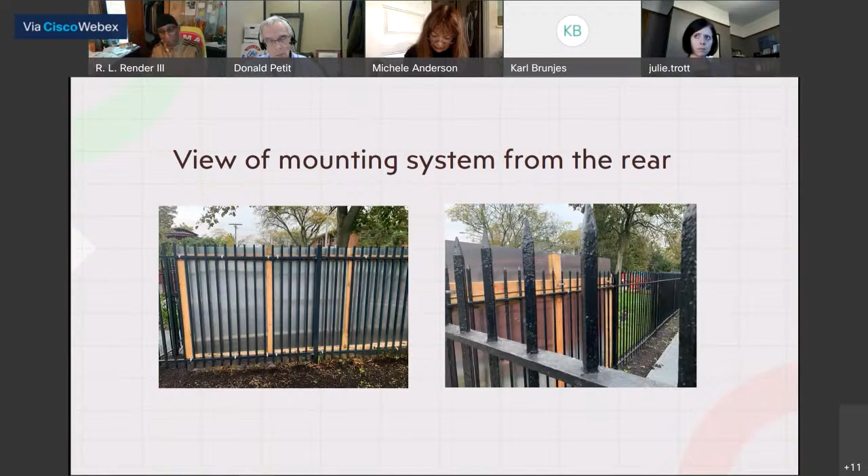And that's another view of the fence where the actual mural, the mural consists of 11 panels, and then there were 2 additional panels that were added. But that's the back side of where the 11 panels would be installed.

The thing that kind of guided me through this, some of the content, was that I worked at the Historical Society for 12 years. I started off with the African American Archives Auxiliary, which is the largest repository of information on African Americans in northeastern Ohio. Then I was a consultant, and then I actually was a project manager for different projects related to the African American community. So that's kind of influenced me.

The other reason why we picked some of the individuals that are part of the content of this is because I was always amazed working at the Historical Society how little so many African Americans, particularly young people under 40 years old, knew about their own cultural heritage and history.